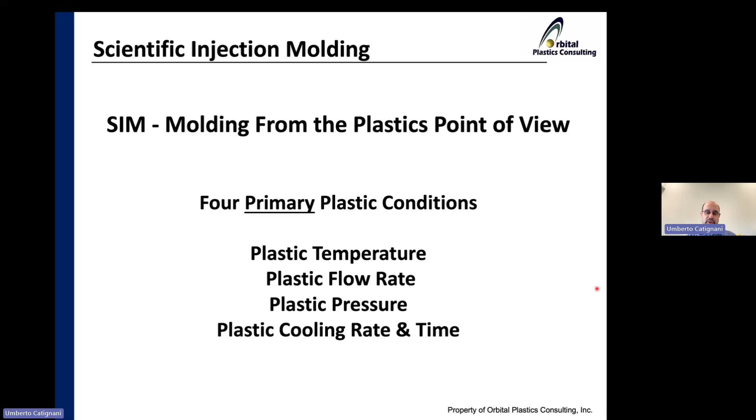But real quick, scientific injection molding - you guys all know we've got the 4 primary plastic conditions which dictate our process. We want to establish these when we're debugging a mold, setting up a mold in a machine, and that allows us to move molds from one machine to another.

I just touch on this quickly because as processors, we have the ability to change a lot on the machine settings, and that's going to be based on what our customer requires. Obviously, if we're making bad parts, that's our signal to go to the machine and change something, right? But ultimately, we do have these 4 primary plastic conditions, whether you're documenting them or not, but they exist, and this is a great way to help move molds from one machine to another and duplicate that process.

And part of this talk is doing that, focusing on plastic flow rate.

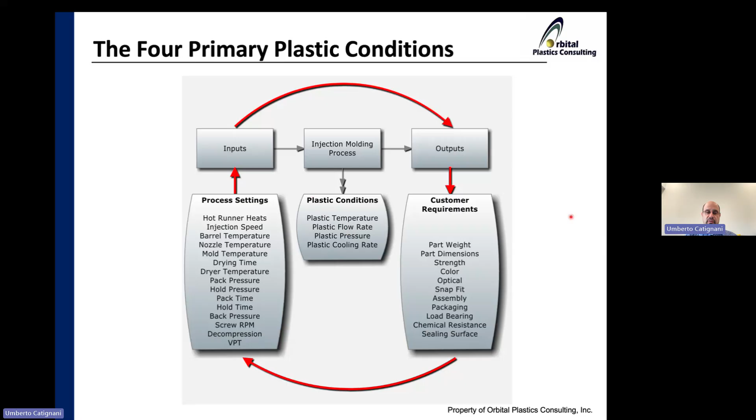So I throw this slide up because I think everybody in industry understands this - that I can't just load the process up every day from the machine and make the exact same parts. There's always going to be variations, lot to lot variations in material, dryness. But I'm sure you guys have heard many times, we were making good parts yesterday. Why aren't we making good parts today? Second shift, third shift, on and on.

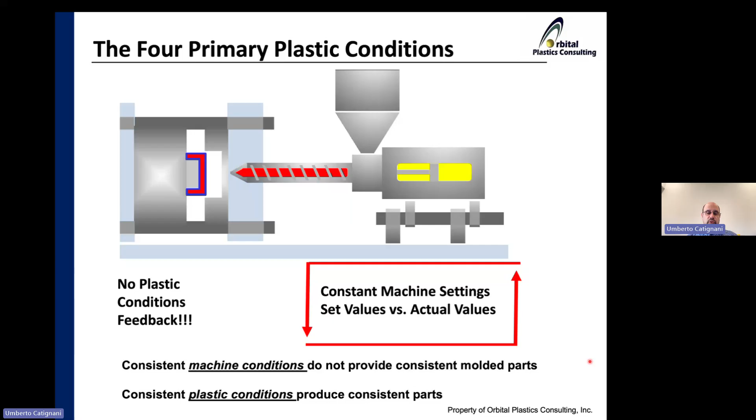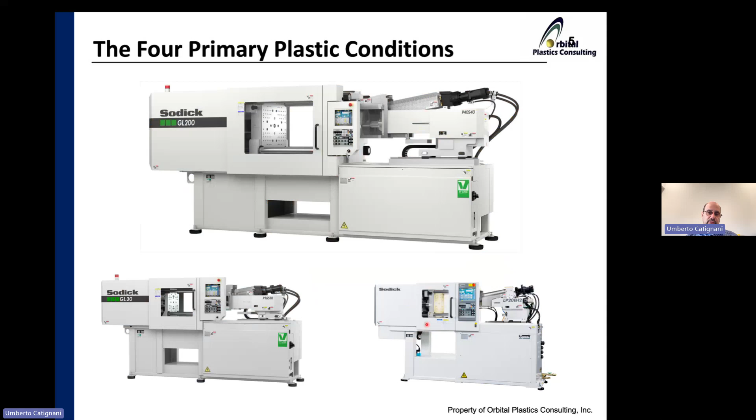But this is, I think, an important slide that I always try to show to people that might be new to injection molding or not on the floor doing some technical molding things like that. So again, moving molds from one machine to another is what we're trying to do - smaller machine to a bigger machine. If I can make parts on this smaller Sodick, then I should be able to make parts on another machine if I duplicate these 4 primary plastic conditions.

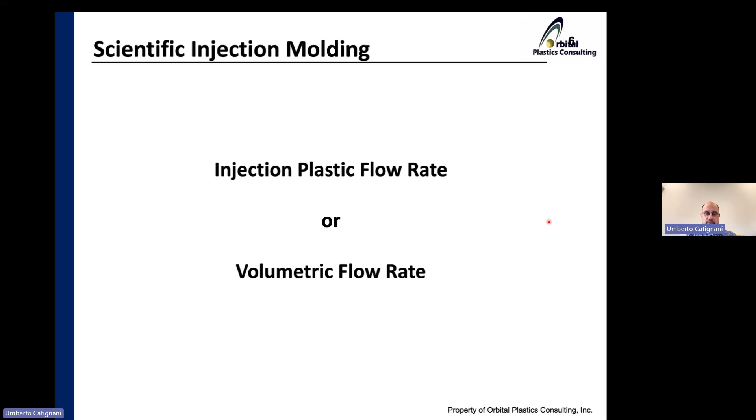So with that, let's focus on plastic flow rate, or if you want to think of it as the volumetric flow rate. So we know that as we fill faster, increase our plastic flow rate, the amount of molecular orientation - we have a velocity profile. We have drag flow at the wall. We eventually get plug flow when the plastic starts to skin up, and then we have fountain flow here.

So that flow speed difference generates this orientation. That orientation thereby lowers the viscosity of the material, non-Newtonian flow, and then shear heat. Obviously, when these chains are flowing at different speeds, they'll be rubbing against each other, generating friction. So flow rate's very important.

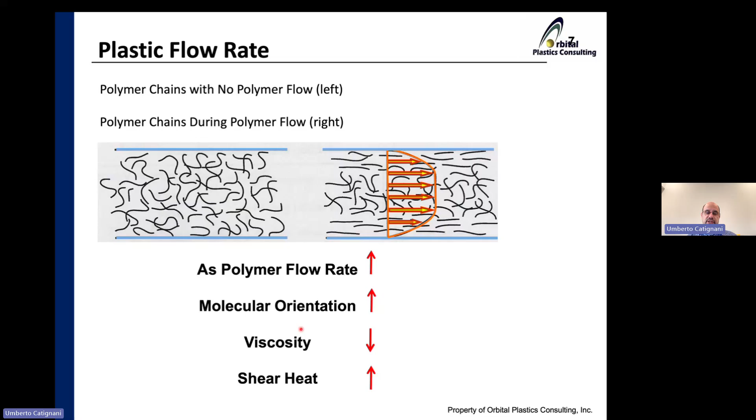If I change injection speed, I change the heat generated. So I'm actually changing - go back to the 4 conditions - I'm actually changing the cooling rate. I could be changing the crystallinity, shrinkage, the amount of flow rate. Fill faster, I put in more molecular orientation. How fast do I cool is retained orientation. So these are all linked together, but I thought I would just touch on that.

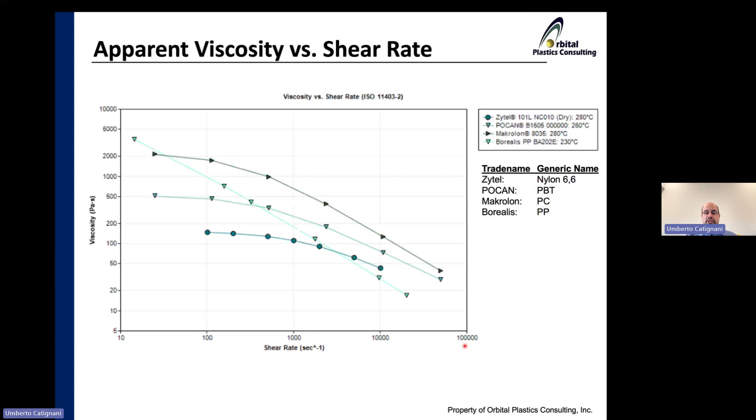And just showing an apparent viscosity versus shear rate curve for several materials out here I just picked. Obviously, viscosity is decreasing as shear rate's increasing. That should be no surprise to anyone here on this.

But let's talk about the machine rheology curve that's used out there quite frequently. So fundamentally, the equation is, we're going to take the fill time and multiply by the hydraulic pressure and convert it to plastic pressure using the intensification ratio. And then we're going to use our shear rate as 1 over the fill time.

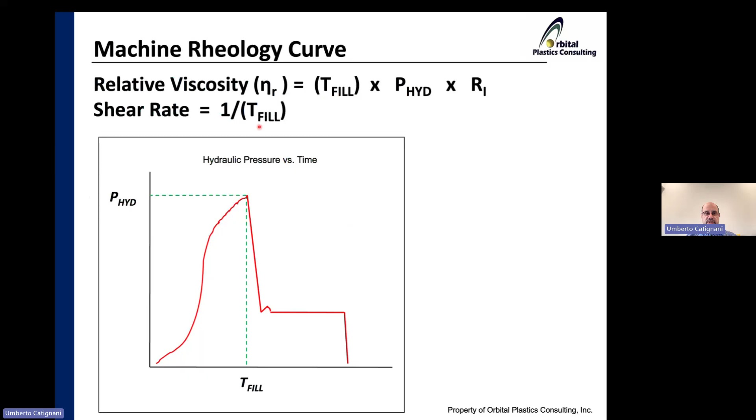So with that, I just thought I'd show that Autodesk uses the cross WLF viscosity model. You can see this viscosity equation, this is the zero shear viscosity here, and this equation will drive that variable. This is done with the apparent viscosity data generated from a melt rheometer, and you have to do a lot of fitting to get these constants. We even have the glass transition temperature here.

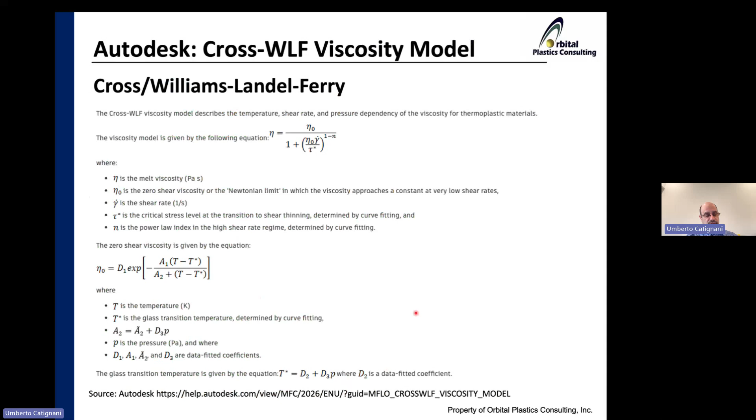So the actual apparent viscosity you would use to do mold filling analysis is completely different. It's not a relative viscosity, it's an apparent viscosity. So let's compare the two and go from there.

If I do a relative viscosity curve, what we do is pick a range of injection speeds, machine velocities, and plot them as relative or effective viscosity versus shear rate. This viscosity is the intensification ratio times the hydraulic pressure.

So back here, the fill time, shear rate will be 1 over the fill time. If we do this kind of math with this data, typically people will use the shape of this curve to determine an optimum injection speed.

So if I do this, we would argue, look, this is the flat part of the curve. A change, maybe a swing of 10% in viscosity or moisture, we're processing in a viscosity that's lower. If I'm plus or minus 5% of 30,000 versus plus or minus 5% of say 5,000, that's still plus or minus 5%, but down in a much lower range. I would stipulate that a quarter inch a second and a half inch a second here are most likely, depending on your part, reasonable injection speeds.

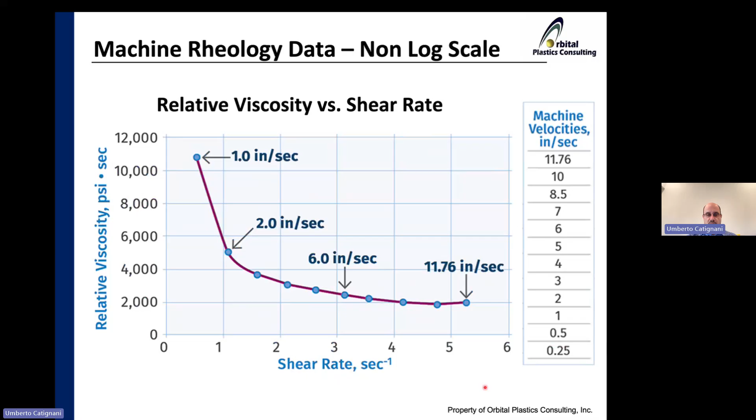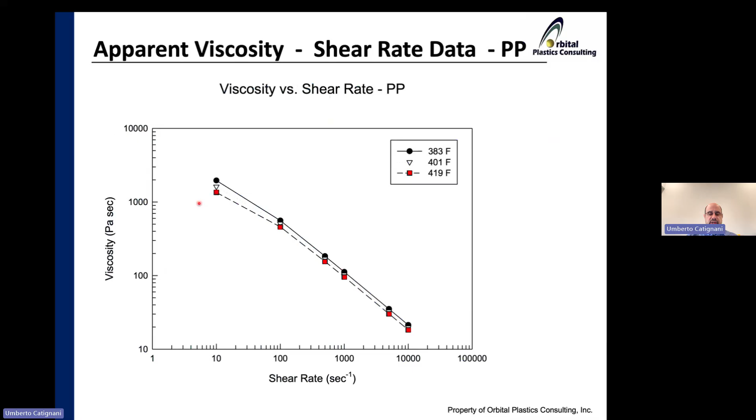So I'm going to plot this relative viscosity data on a log scale that I just showed you guys. This is actually melt rheometer data for polypropylene I got online - this is the data you would get from a melt rheometer. So let's plot those two together.

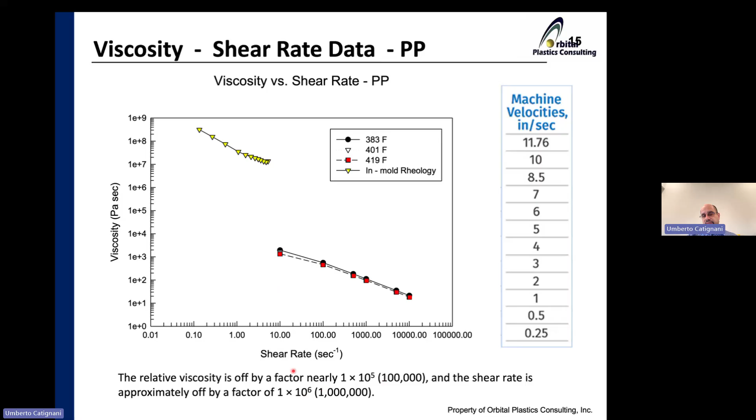If we could have a shift factor to some effect, that would help. So you see, when you compare this to viscosity data that's used in mold filling analysis and other simulations, it starts to break down as to the data you're generating, the equations, and the values we're using for shear rate and viscosity. So - limitations. Would I need to generate this relative viscosity curve if I'm doing thin wall molding?

We know we need to fill fast, but how fast is fast? It's not a proper term from a scientific or engineering point of view. We would talk volumetric flow rates.

But what about PET preforms? I've molded these, and you typically inject, I believe, 8 to 12 grams per second based on the size of the preform, because we don't want to generate shear heat, to minimize the temperature so that we can cool the preforms and minimize the crystallinity.

Then, having molded many parts—automotive, cosmetics—I can't just use one injection speed. I might be processing out gate blush, or flow lines throughout the length of the part. So trying to pick one injection speed in my career has not really worked out very well. It's possible, we can start there to keep it simple, but a lot of tooling and parts do not lend themselves to this approach.

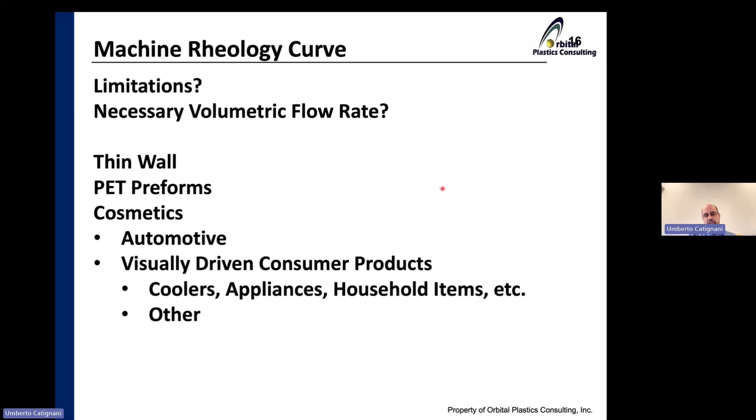So let's talk about velocity capability. You guys will maybe benchmark your machine. I'm going to set the speed to say 10 inches a second, and this would be the expected velocity. So if I could accelerate instantaneously and fill the mold, I would be at 10 inches a second. Well, obviously nothing accelerates instantaneously.

So as the injection speed set point increases, the distance from our perfect expected speed to fill the mold—if we could instantaneously accelerate—is going to get greater. So let's take a little deeper dive and look at this.

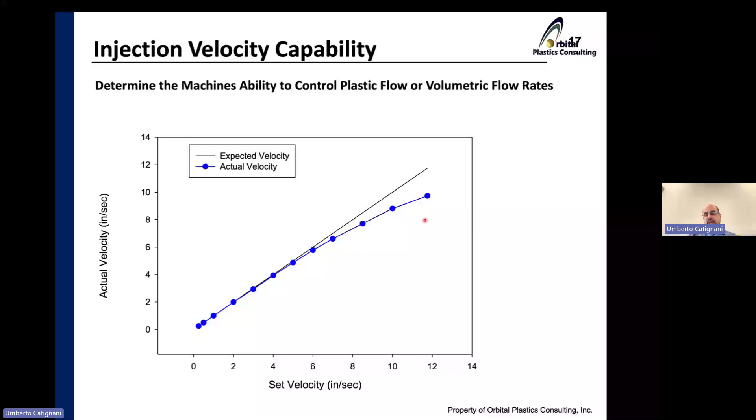One thing you should note is the injection responsiveness of the machine is fundamentally the same—the slope of this line, the ability to ramp up, is consistent. So obviously, the higher the injection speed, the less time we're going to be at that speed.

And then if we calculate the average injection speed, obviously from the previous graph, you can see that as we fill faster, we're going to move further away from the perfect injection speed, meaning we're not instantaneously accelerating.

With this velocity capability, the common method out there is basically calculating an average plastic flow rate through the injection. So we're really looking at distance traveled, the average velocity during injection, and the time.

I've put forward a second method that looks at percentage of fill time at that flow rate. So what are we ramping up, what am I really achieving? This will force you to look at the curves.

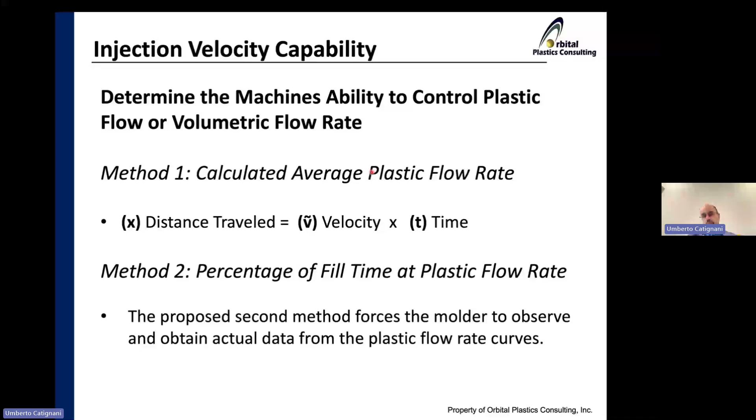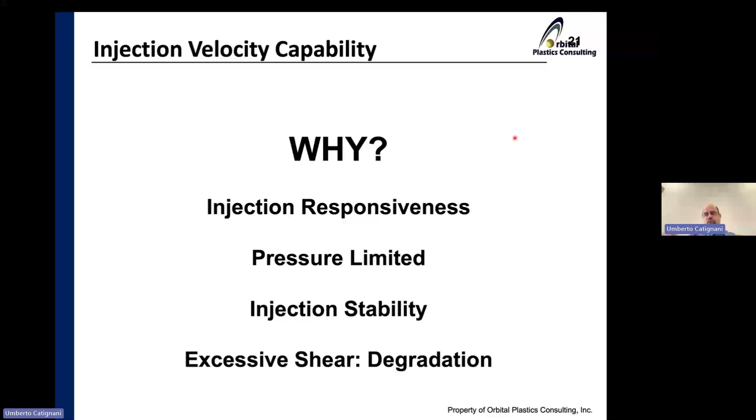So let's look at some potentially misleading situations: being pressure limited, stability, responsiveness. How do I know if I'm not pressure limited while doing this velocity capability study, or if the machine is at its relative viscosity limit? We could check the peak pressure to make sure we're not exceeding that, but it's ideal to graph it and confirm.

With this curve here, we're graphing pressure, injection speed velocity, and screw position. So what we really have here is the injection speed we are asking the machine to achieve, and this pressure here is 20,000—so we're telling the machine not to exceed 20,000.

You can see what happens: as we start to inject, we hit the allowable pressure of 20,000 and our speed drops off. We're no longer in closed loop control—we need a greater amount of pressure to continue the machine injecting at the program speed. So if I'm pressure limited, I might not catch that while doing these experiments. Looking at the graphs and verifying this is very important.

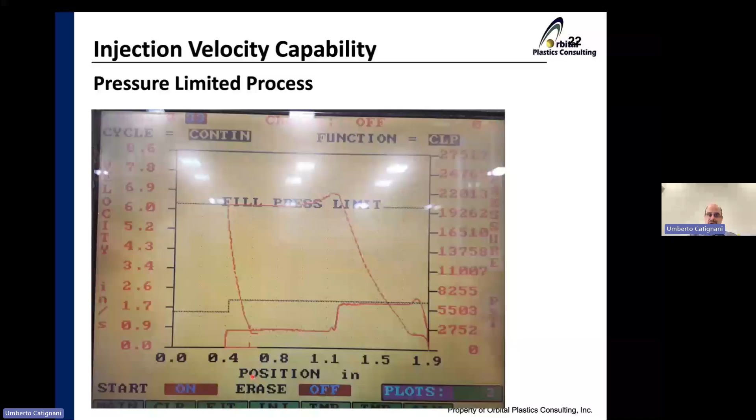Then also injection responsiveness—you wouldn't know how responsive your machine is if you didn't take a look at the graph. This machine has different responsiveness, ramping up to 10 inches a second in about 0.02 seconds, so that's very good. I would take that on my 1995 Van Dorns that I started on, and I'd be happy if I got up to speed in maybe a half second.

If you're not looking at your curves, you could be missing out on how responsive this machine is. And don't forget, when we're generating this kind of data, we want to duplicate that plastic flow rate on another machine. So it's imperative we look at that and think about using it on multiple machines. I'll touch on that in a little bit.

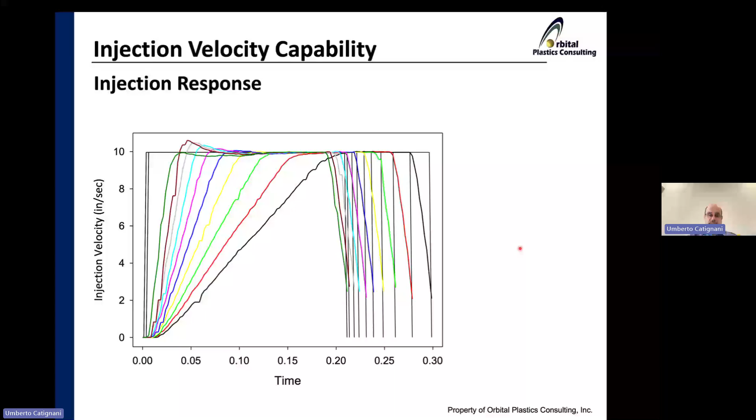What if I had something like a decreasing oscillating waveform like this? You guys see I'm ramping up to injection very quickly, here's my set point, but I'm not stabilizing. If I were to generate my viscosity curve or even the velocity capability by calculating an average speed, I would never catch this. If I'm using the second method, where I'm looking at the percent of time we're actually at speed, this would give us much different data showing we're at speed for a certain time versus an average speed.

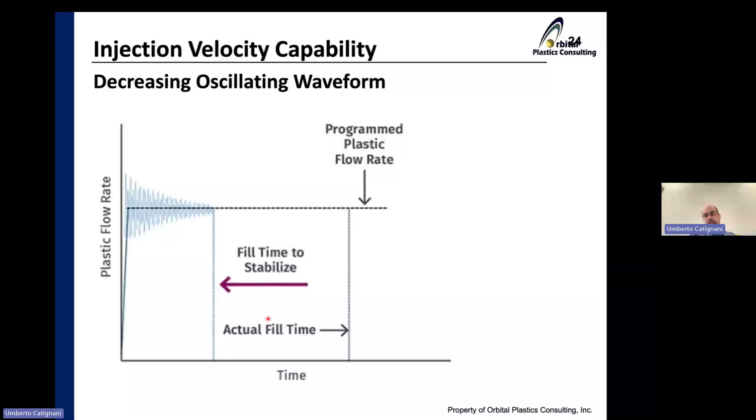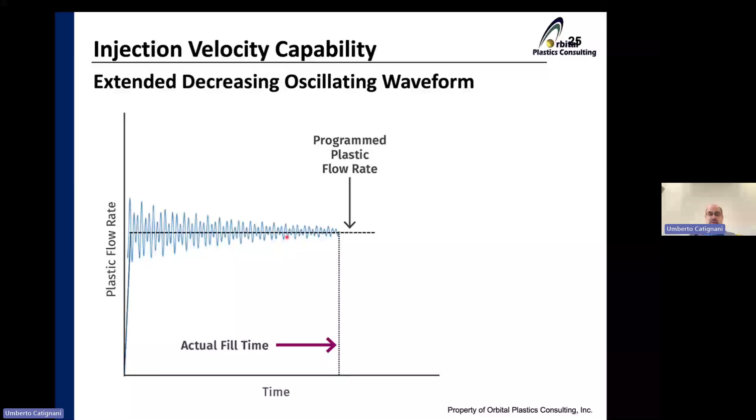So unless you look at a curve like this, you wouldn't catch that. And it could be repeatable. Obviously, if it's still doing the same oscillating through the entire injection, we could actually get a repeatable, consistent fill time, because the machine's consistently, quote, inconsistent, I guess you could say.

Here's an extreme example I've thought up: what if the injection speed went over the programmed injection speed the same amount as it went under, and we transferred right here - this is a bit excessive. Barring that we didn't instantaneously accelerate, you would say your velocity is 99% capable, that your average speed was 99% of the set point. Nothing could be further from the truth with this type of condition.

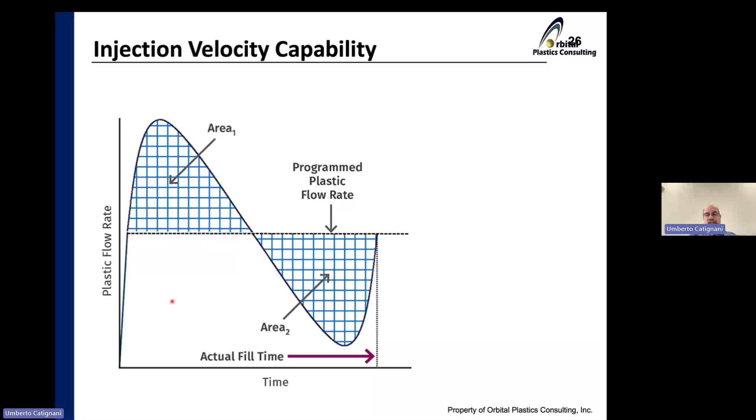So with that, let's get to some of the data I generated. Using the standard method of velocity capability, we calculate the expected fill time if the machine instantaneously accelerated at 10 inches a second over that distance traveled, which gives us an expected fill time of 0.185.

But in this case, we actually got an actual injection time of 0.21. So if we run it through the set of equations for this experiment, our average speed is 8.81. With method one, that's 88% - just move this over a decimal place - the average speed is 88% of the set point. Typically anything over 80% when you do this experiment is considered a reasonable speed.

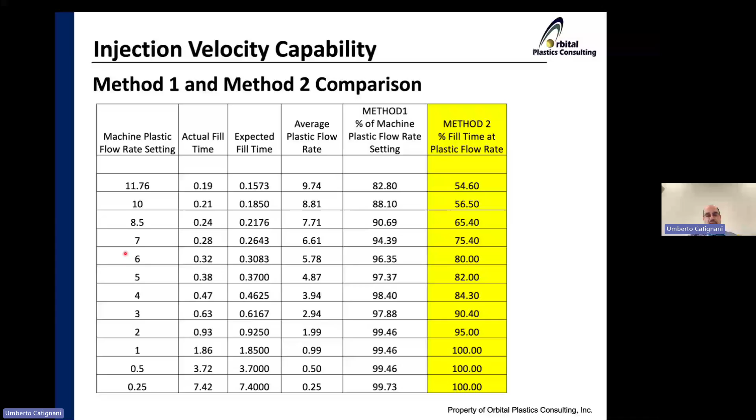So if I take a step forward, what we're really saying here is the blue line - we've ramped up, and from this point forward, we're at speed for 80% of the fill time. I was pretty strict when I picked these numbers; if I had to do it again, I'd probably put a plus or minus 1-2% on that. But hopefully you see what I'm trying to do with an average injection speed versus a plastic flow rate in which we're at that speed. So if I take that 6 inches a second and say, okay, we're capable where 80% of our fill time is actually at our set point of 6 inches a second.

Now we have to think about this. We want to move our mold to another machine. So picking a viscosity or an injection speed off that viscosity curve, we've talked about the range and its shape being an issue. What about picking a speed that's going to be duplicated on another machine? So hypothetically,

35, 30, and 25 millimeter screw. So I convert the linear injection speed to a volumetric flow rate, cross-sectional area times the velocity. And so we want to move our mold to another machine. We need to generate, if we use 6 inches a second with this 40 millimeter screw, we need to generate

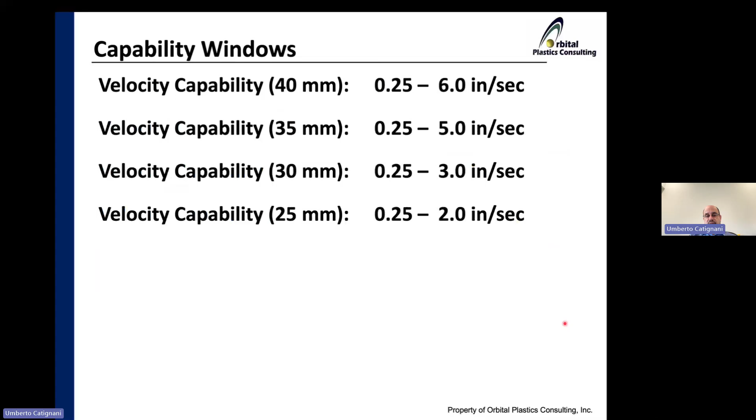Maybe you can, maybe you can't. So another thing we can do to help determine where we should inject is a cavity imbalance study. And I've only seen this done when you pick one injection speed. And that's what I did here. I obviously picked an injection speed. And the goal here is, I have an 8 cavity mold.

And so we want to, I apologize, run these at different injection speeds. I've mainly seen it done, like I said, at just one injection speed, because if I pick the relative viscosity curve gives me a range, say on that first curve of 2 to 12 inches a second, we're going to pick something in between there.

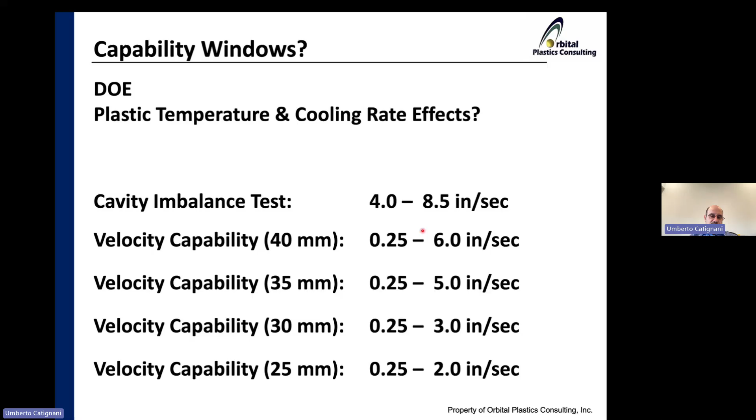So thinking about the DOE and moving forward now, this would give me a range that I would probably target based on the experiments that I did for my mold. And so I just thought I'd share with everyone.

I've used quite a number of machines in the industry, and this Sodick has got a rather incredible control on injection speed. There's no reason why you would program a machine for injecting a part like this, but when I was first introduced to the machine, I was kind of in awe of how fast the machine could inject.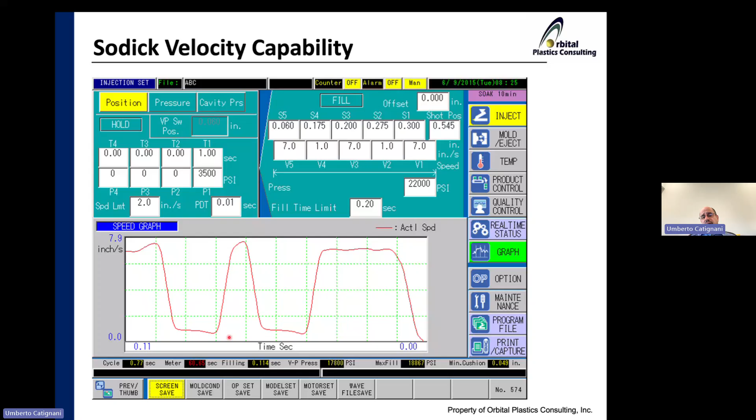So I thought I'd share that with everybody. So with that, these articles I wrote for moving beyond this relative viscosity curve, we talked about another method for velocity capability, also using the cavity imbalance. So these are on Plastics Technology Online, or published up there.

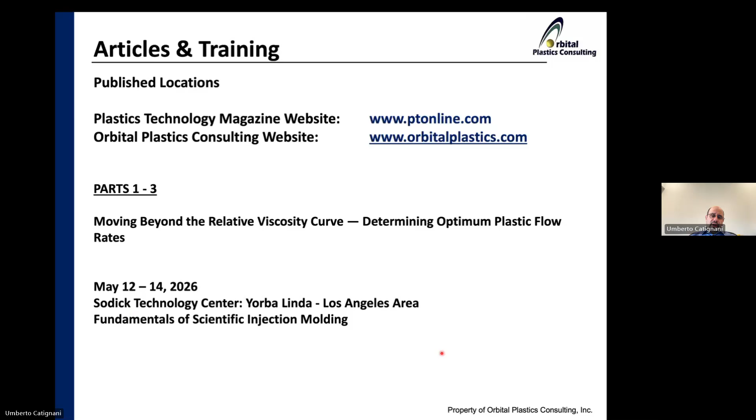So with that, that's what I had for the presentation. I'll say a few things - I've taught this quite a number of times, and I'm really not telling anyone to not do the machine viscosity curve or the velocity capability study method one that's been taught and done for years. What I'm suggesting is perhaps you can get a better idea of what your machine is capable of, what machines are repeatable on different machines, from moving molds from one machine to another. That's the whole purpose of scientific molding - the purpose of doing these experiments. So I'm not telling anyone not to do this. I'm just suggesting to be aware of the data you're capturing and what it truly represents, how you're interpreting it, and how you're using it to set your process in production.

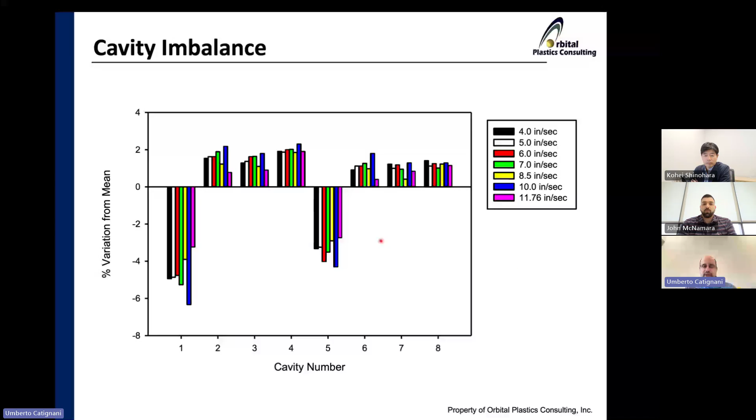This first one says: thank you for showing method 2, which shows the percent fill time at the desired plastic flow rate. How did you calculate these percentages, or were they visually estimated based on the plot of measured and set injection velocities? Yeah, I actually brought up the curves themselves, and I basically just plot the injection curve and went across with the cursor and looked for the speed to stabilize, and I could come through and capture that time. Let me just bounce back a few slides here. So basically I would plot this - say this one, obviously we ramped up to speed perfectly, but let's say the 10 inches a second, I would come across this curve and just look for the speed to stabilize at 10. Then subtract that time minus the fill time, and that percentage would be your percent at the programmed plastic flow rate.

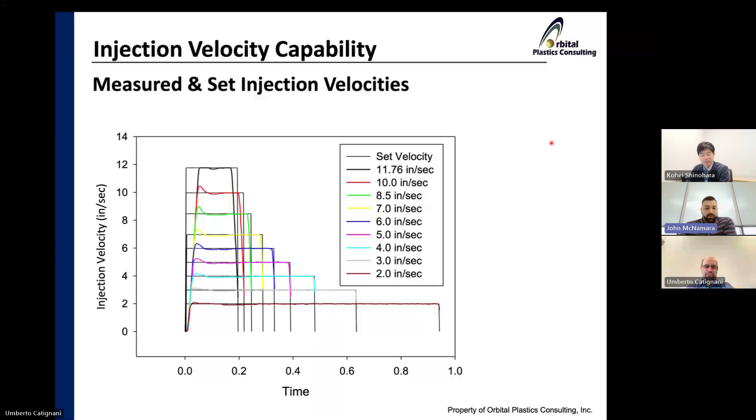How about this one? What do you think is causing the cavity imbalance observed during your experiment? Yeah, that's a great question.

It's got to be shear rate related. If I had to do this over again, I would like to have gone back, and like I said, I got this in 2007. I did this, so I'd like to go back and get the actual gate diameters. Is that really affecting it more than maybe the shear rate of the different injection speeds? I think you guys are probably familiar with an 8-cavity mold where the 4 inside cavities fill faster than the 4 outside, and hence the melt flipper that John Beaumont has invented to help balance the temperature, flipping the melt.

I really can't say, and I wish I had the money to go back and actually potentially even change the runner design instead of the sharp one that we have. Maybe if I rounded it out, would that show as much imbalance? So I think that's a great question, and I'm not 100% sure, but I'd have to say it's shear heat related.